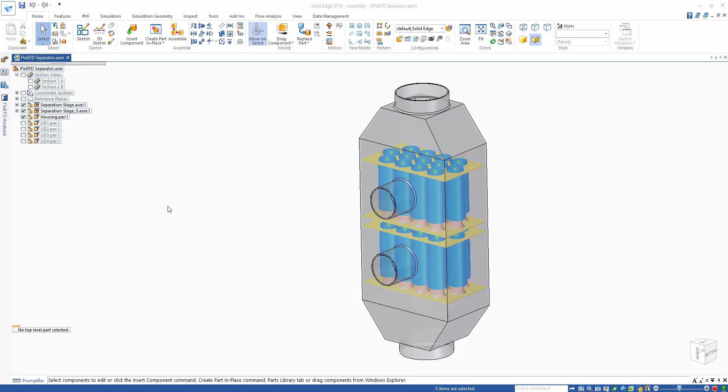Hello and welcome to this FloEFD example where we're going to be looking at a cyclonic separator in FloEFD, where we have an air inlet, two outlets for the cleaning stages, and the third clean air outlet. This is a passive device using vortex technology, and let's have a look at some of the design behind this particular separator.

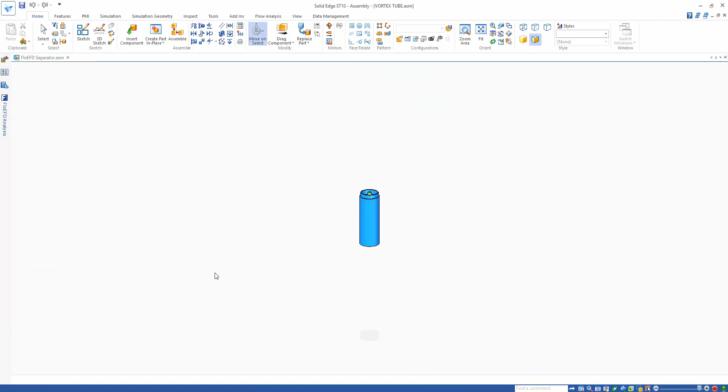You can see that we have a single spiral that's going to be forcing air towards the outside of this vortex tube, and we can understand that the particles are going to be flung outwards and then separated from the flow as it goes through the device.

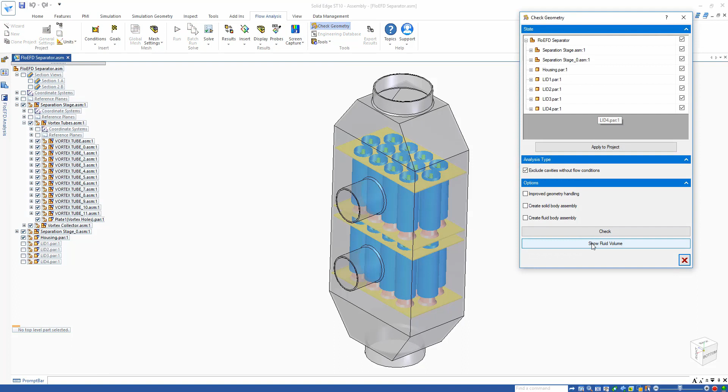In FloEFD we can check the geometry to ensure that we are getting the correct fluid region in the model, so the air cavity or air volume is going to be correct. You can see on the screen this blue volume, which is the correct air volume, so we're ready to go.

Let's go to our FloEFD analysis and look at some of the setup. First of all, we have 100 CFM on the inlet. We then have 3 pressure outlets: the first stage of cleaning, the second stage of cleaning, and hopefully the last clean air stage right at the bottom.

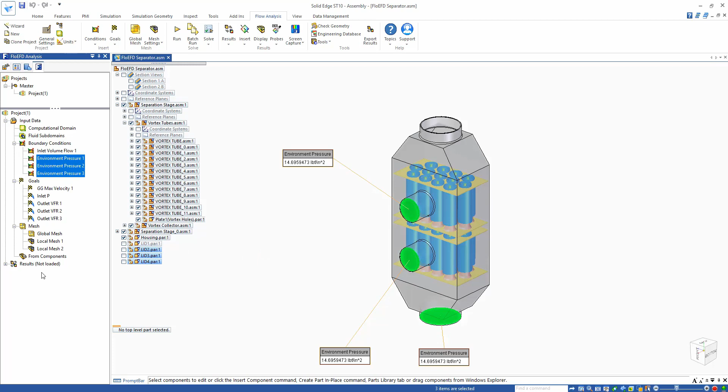So let's load the results. First of all, let's take a cross section. We have that there, and we can have a look at what the computational mesh looks like.

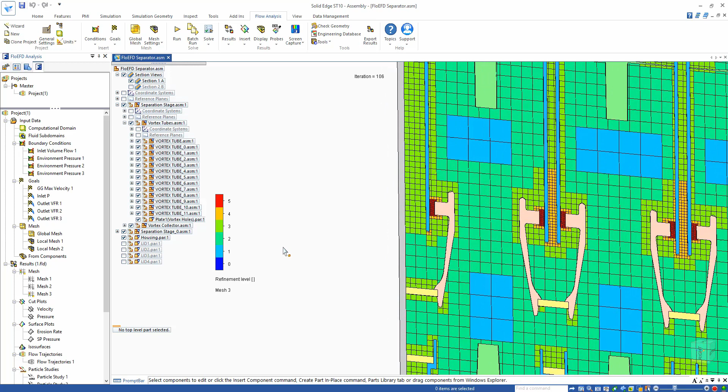FloEFD uses a finite volume mesh, and you can see we have coarse regions on the inlet, medium regions around the spiral, and a very fine grid region in red on the outlet of each of the vortex tubes, which indicates our separation zone as the particles stick to the outside of the vortex tubes. So that's what the computational mesh looks like.

Let's have a look at the velocity through our model, and I can probe that now to get a feel for what sort of velocities I'm going to be getting through the model. Right, so we can see velocities there, and on the outlet as well I can see what sort of velocity I'm going to be getting.

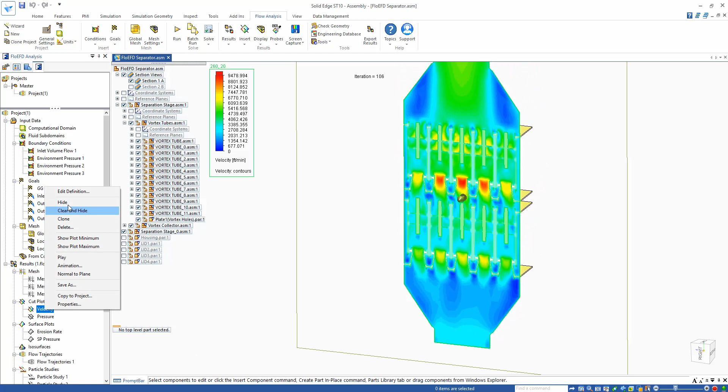We can also have a look at what the flow pressure looks like. So to maintain that 100 CFM, what's the delta P got to be? We can see the inlet pressure and the outlet pressure, so maybe 0.18 psi or so upstream pressure required to maintain that 100 CFM through the unit.

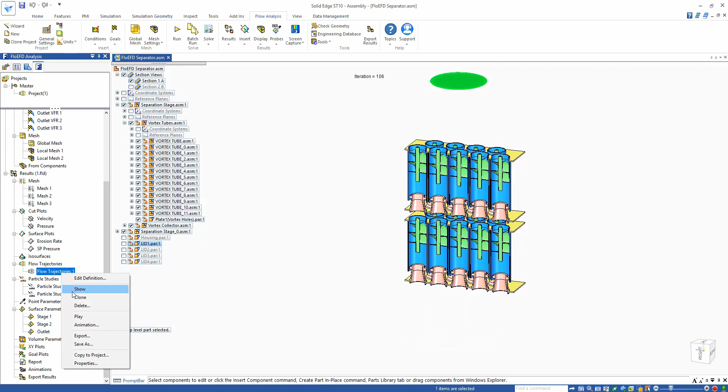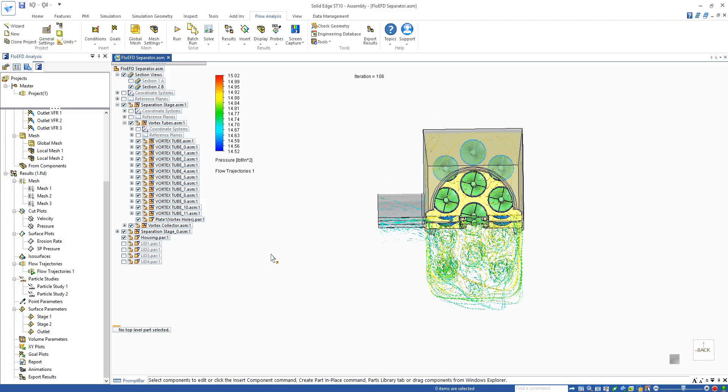We can introduce and look at some zero mass particles into the flow just to visualize what the airflow looks like. So you can see there we can actually play these, bring back the housing, turn off the section, and you can see what the flow trajectories look like as it goes through the model. I can take this section like this, and we can see the flow with these zero mass particles.

Because we want to understand what the separation efficiency actually looks like, we can use something called a particle study. So let's activate this particular particle study. Now I've got 3 injections: 50 micron, 5 micron, and a 0.5 micron injection into this model.

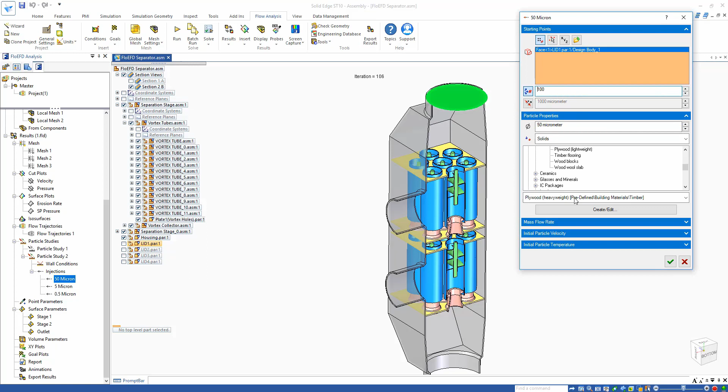If I just edit this, you can see that this is going to be a 50 micrometer, 100 injections, and I've got a plywood material on here at 50 micron, and we want to understand what the flow looks like. So let's just activate this.

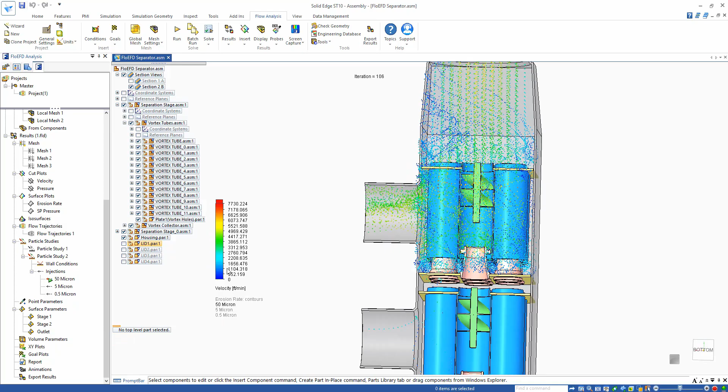If we show that now, right, so we can see the particles coming in to our model. This is colored by velocity. You can see there is the swirling effect as it goes down. You can see how they're sticking to the outside of these vortex tubes. There's no moving parts in this, completely passive device, and then you can see how it's being separated and moved out and going towards the outlet of the first stage.

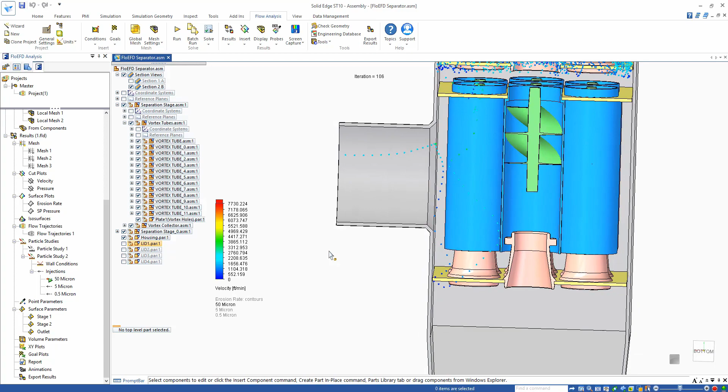A little bit gets through to the second stage, but not as much as the first stage. So the separation efficiency is pretty good for 50 micron. Let's have a look at what happens at 5 micron.

Alright, so we're getting a little bit more. The first stage is taking care of most of it, but the second stage, a little bit more is getting through this time, and then finally a little bit more getting through out towards the outlet as well.

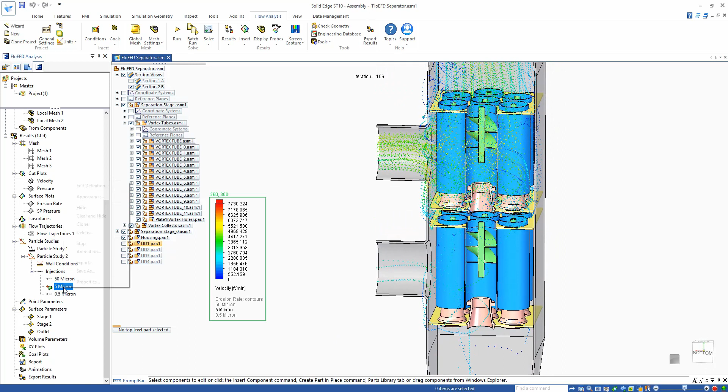And then finally, let's have a look at 0.5 microns. What does that do? We get a lot of separation in the first stage, a lot more going through to the second stage, but in the last stage there simply isn't enough mass in those particles, so the separation isn't as great for these 0.5 micron particles going through our separator.

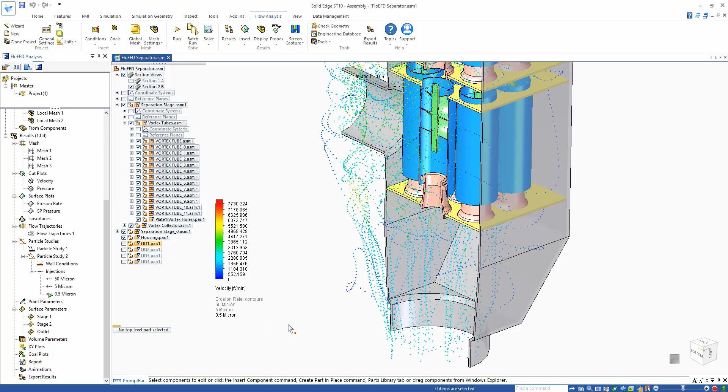So we can get a feel for exactly how good the separation efficiency is. The way to visualize that is to use surface parameters. If we look at our stage 1, in stage 1 we're removing 98.5% of the 50 micron particles, 93% of the 5 micron, but for the 0.5 micron we're only removing 32.4% of those particles out of 1,000.

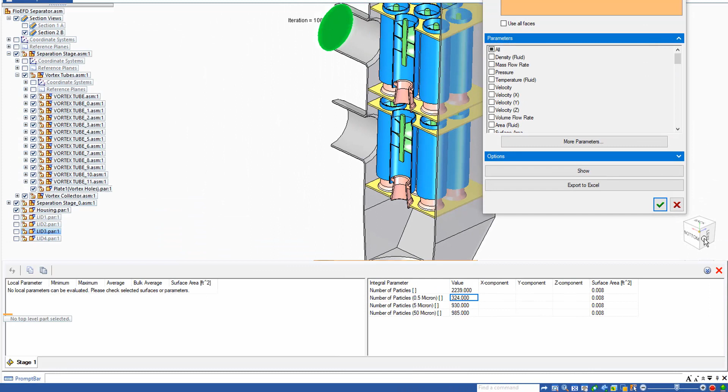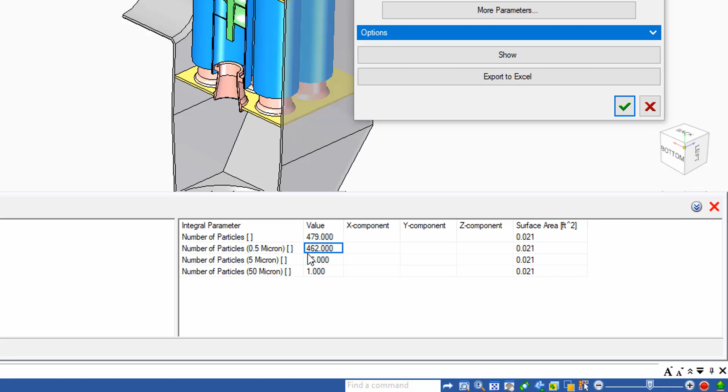And then finally, if we look on the outlet to understand how many particles are going down there, we can see that only 0.1% of the 50 micron particles are getting through, but for the 0.5 micron, you can see 462 of the original 1,000 particles are getting through. So only a 53% separation efficiency at 0.5 micron.

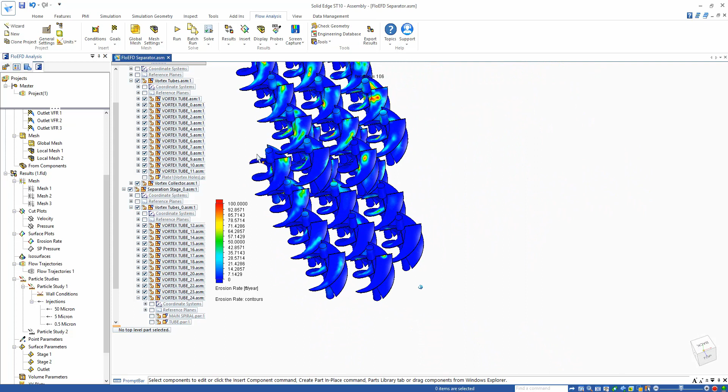Finally, let's see what sort of erosion rate we're going to be getting on our spirals to see how many particles are actually hitting those surfaces. If I hide the geometry, we can now see, due to the top section there, what sort of erosion rate we get. The outer ones aren't getting as much as the inner ones, but that shows you which particles are hitting on which surfaces and where, and how badly the wearing effect is going to be due to the particles going through this particular system.